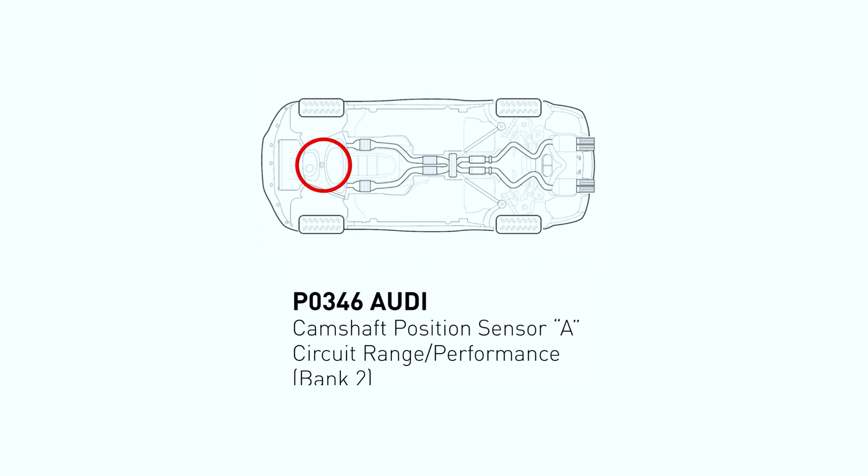Use the AUDI scanner to scan your vehicle and see the error code P0346. It means that the engine control module detected the engine camshaft position sensor circuit is not within specifications.

Method A. The crankshaft position sensor. The crankshaft is most often located on the front underside of the engine. It can usually be found mounted to the timing cover.

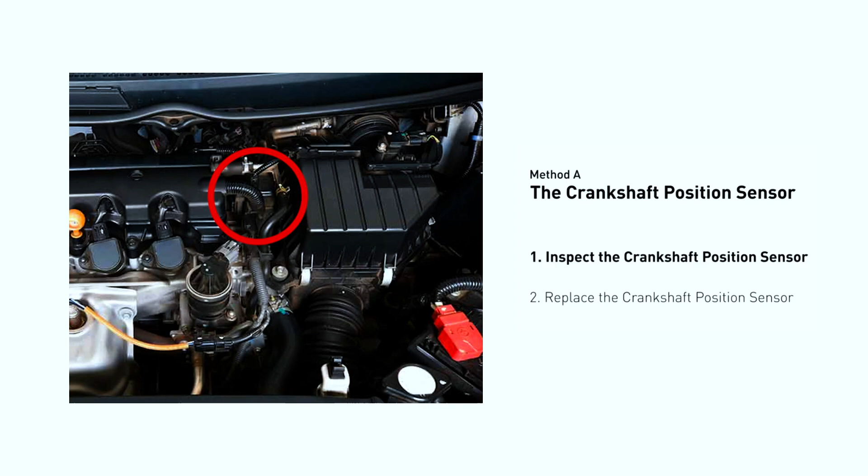First, carefully remove the crankshaft position sensor from the vehicle. Visually inspect the sensor to make sure it hasn't been contaminated by a leak from another engine component. Use a multimeter to proceed with a resistance test on the crankshaft position sensor.

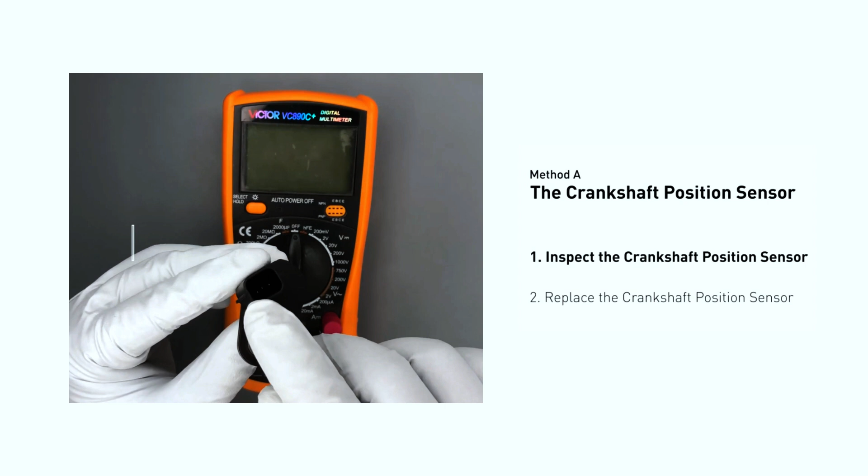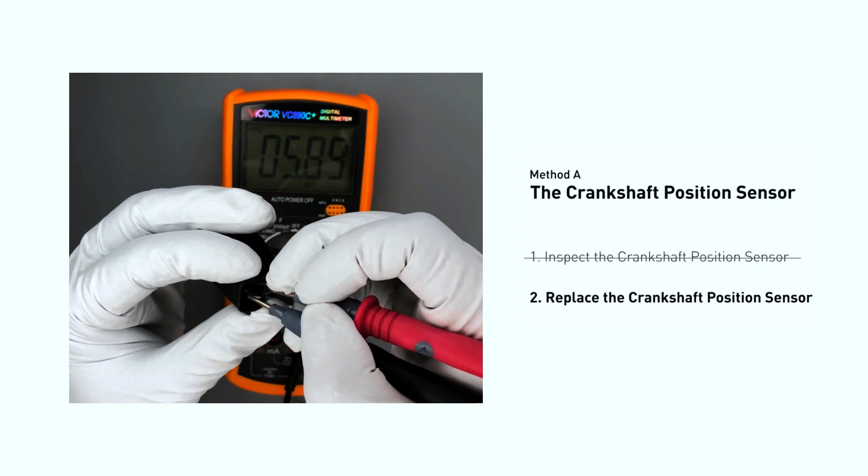In order to get a correct reading, check your owner's manual to see the specific crankshaft position sensor resistance range for your vehicle. If you don't get a reading, this indicates that the crankshaft position sensor is faulty and needs to be replaced. Check to make sure the O-ring from the sensor hasn't fallen into its hole. Then replace it with a new crankshaft position sensor.

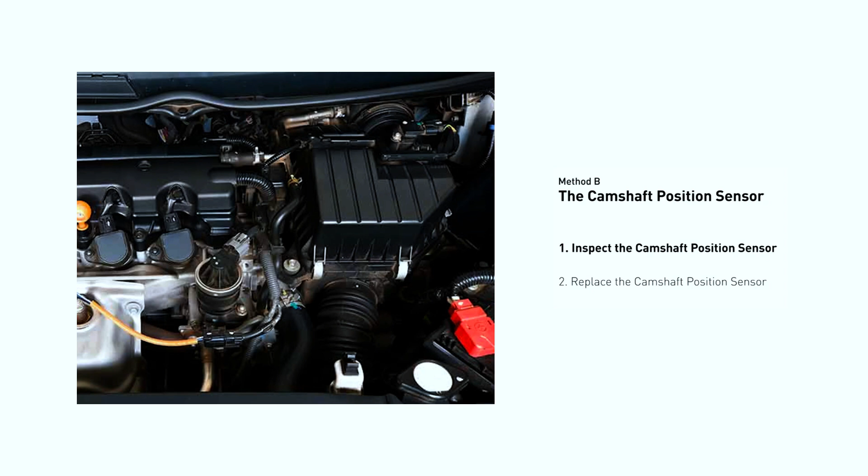Method B. The camshaft position sensor. The camshaft position sensor is located in the valve cover near the top of the engine, or it can be located at the front or rear of the cylinder head.

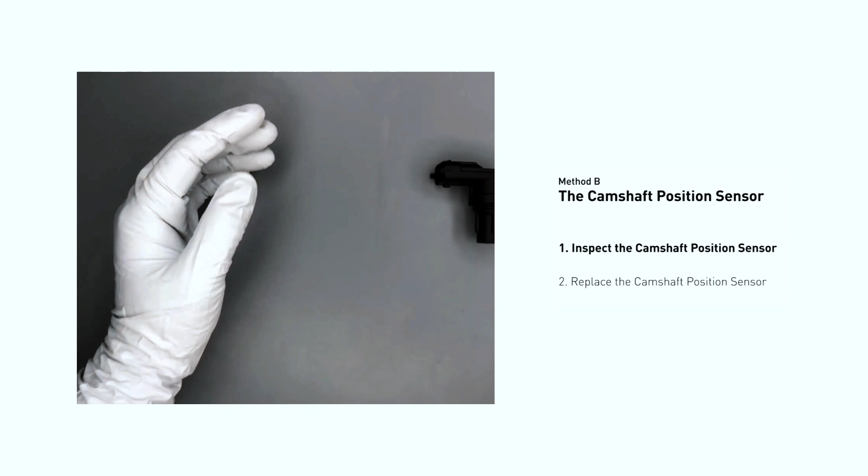First, carefully remove the camshaft position sensor from the vehicle. Visually inspect the sensor to make sure it hasn't been contaminated by a leak from another engine component. Use a multimeter to proceed with a test on the camshaft position sensor.

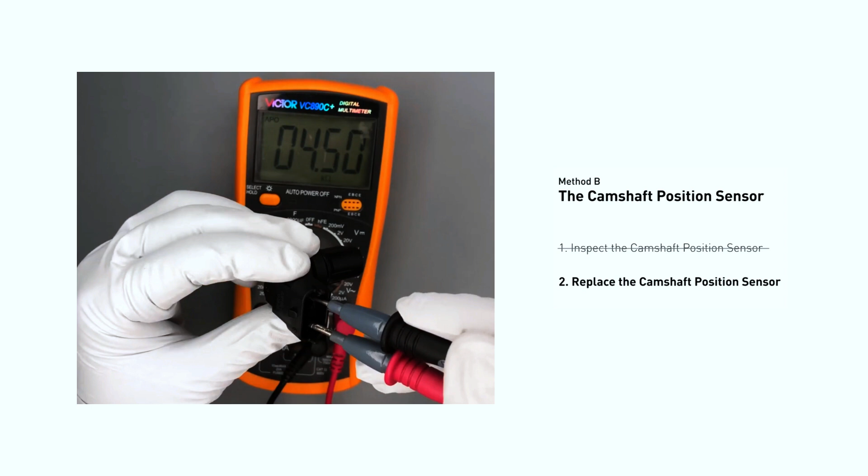In order to get a correct reading, check your owner's manual to see the specific camshaft position sensor resistance range for your vehicle. If you do not get a reading, this indicates that the camshaft position sensor is faulty and needs to be replaced. Check to make sure the O-ring from the sensor hasn't fallen into its hole. Then replace it with a new camshaft position sensor.

So here are 2 of the most practical solutions to fix Audi's P0346 error code. After the repair, you can now use the AUDI scanner to clear the error code and tap the rescan button one more time to make sure everything is fine with your vehicle.